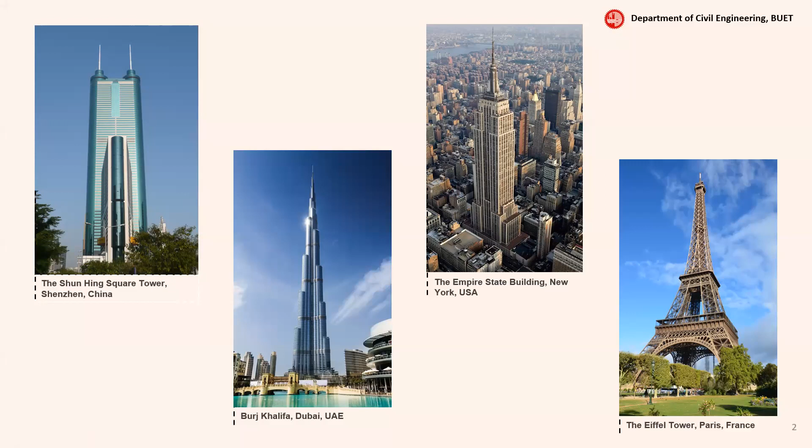Here are some recently built steel structures constructed over the last few decades. There has been a gradual shift in construction materials from concrete structures towards steel structures all over the world. For this purpose, two types of steel are mainly considered: carbon steel and stainless steel. The difference between them lies in their chemical composition, where one contains carbon but no chromium, and the other contains chromium but no carbon.

The life cycle cost of carbon steel is higher than stainless steel, though its initial cost is lower. So it is mainly used in steel products in construction.

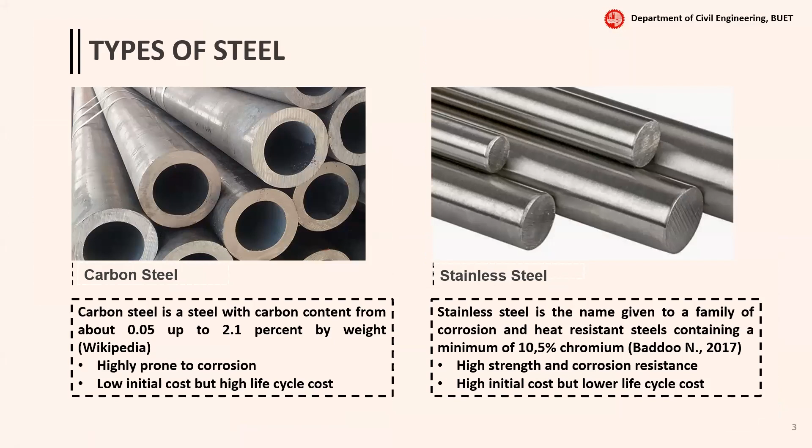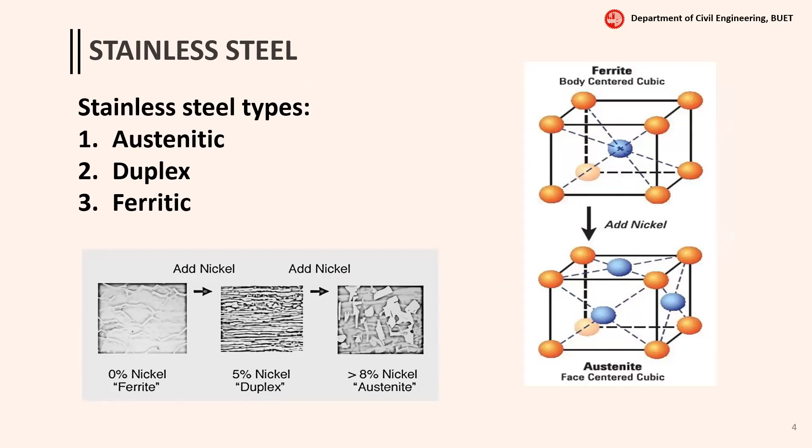There are three types of stainless steel: austenitic, duplex, and ferritic. The difference between them lies in their structure, as shown in the figure. In our study, we will talk about different grades of each of these types. So let's dive into our structure.

The use of steel in construction is becoming popular. However, the most important aspect of steel, its capacity to sustain load when it faces fire—the fire resistance characteristics such as fire rating—has not been well studied at this base.

Addressing this research opportunity, we formulated a plan to evaluate the performance of different grades of stainless steel beams under standard fire using fire ratings as a parameter, and compare the performance of stainless steel beams with that of carbon steel. It is to be noted that by fire rating, we mean the duration for which a beam can sustain load in fire without failure.

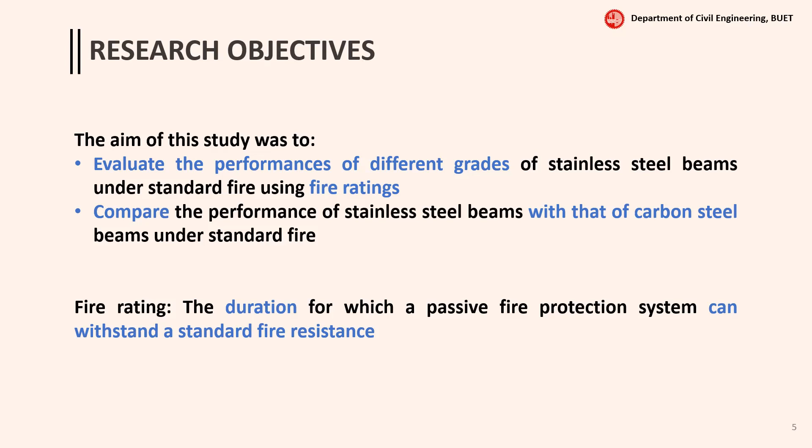Research methodology. Before moving to our findings, let's understand the methods used in our research. For analyzing the behavior, we took two criteria: comparing the performance at the same loading condition while changing the beam section, and comparing the performance at the same section while changing the loading capacity.

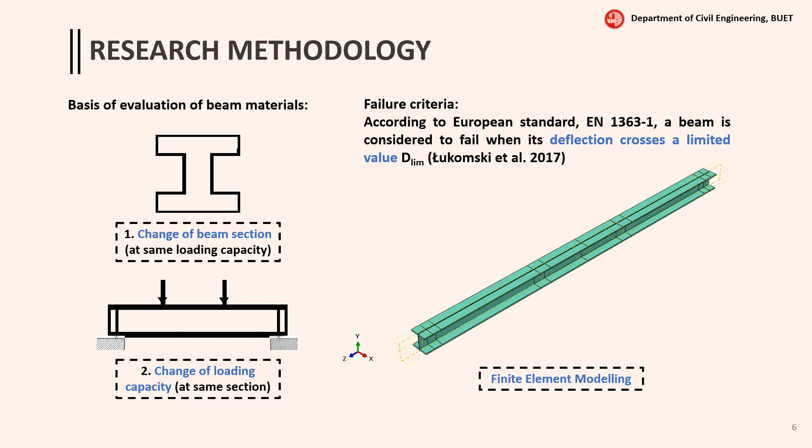For analyzing this behavior, a finite element model was set up from which data was evaluated to get fire rating and failure criteria. The failure criteria was set by fixing a deflection amount calculated using European standard EN 1363-1, beyond which the beam was considered to have failed.

In our study, we used 6 types of materials, including 1 grade of carbon steel, CS355, and 5 grades of stainless steels. 3 beam sections were taken, and 3 loading capacities were applied to each of them.

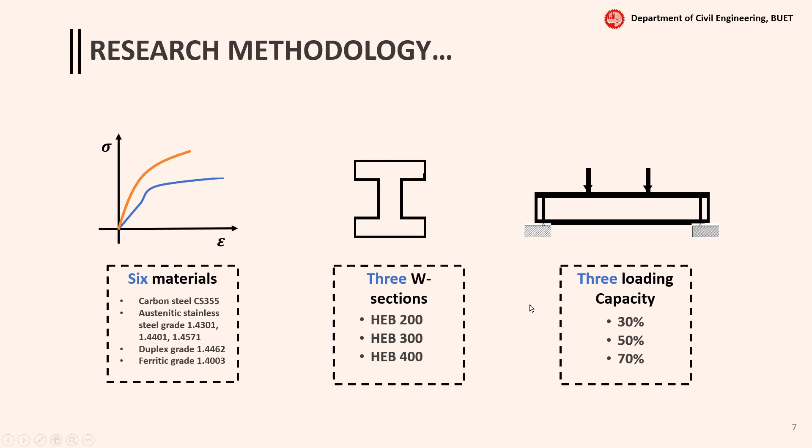The finite element modeling was done using Abaqus CAE version 6.14.4, selecting element type C3D8T, which is suitable for coupled temperature-displacement analysis. Modeling was done in 2 steps: loading and thermal step.

In the loading step, first the structure was analyzed, and then fire load was applied on all 3 sides except the top surface, using fire curve ISO 834 as the firing temperature. The fire loads were applied using convection and radiation with appropriate coefficients.

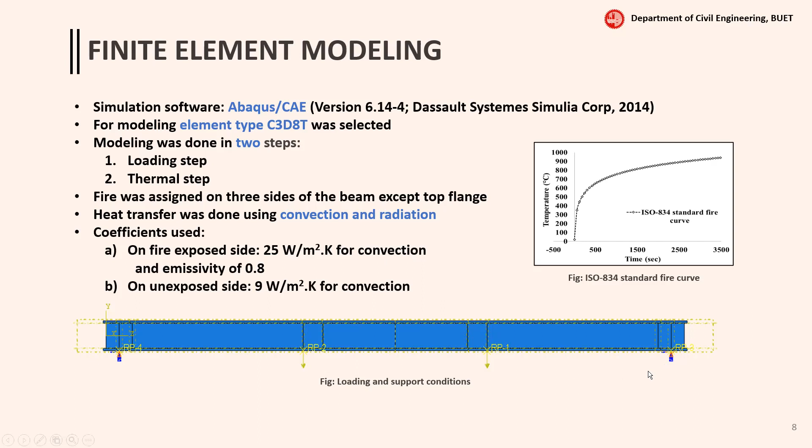Regarding the supporting conditions of the structures: at the left support, translation in the 3 direction was restrained, and at the right support, translation about the 2 direction was restrained. All the rotational degrees of freedom were unrestrained.

Moving on to parametric studies. For loading, we used 2-point loading at desired magnitude, and the load was calculated using class 1 section of Eurocode.

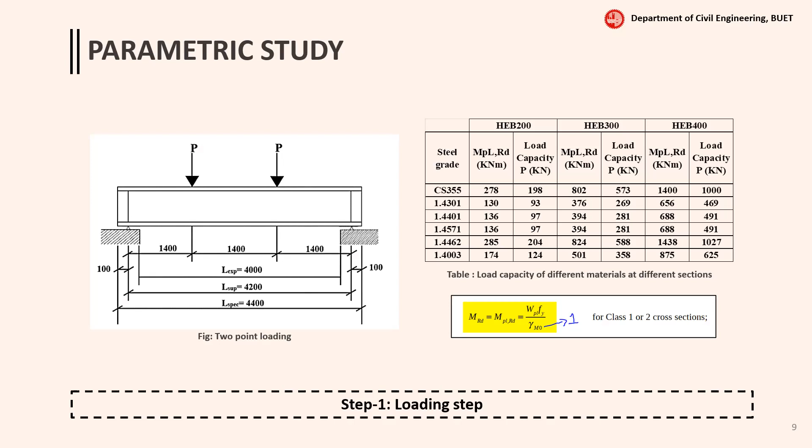Since the characteristic materials of the different grades vary with temperature, we had to calculate the different mechanical and thermal properties of the materials and incorporate them in the model accordingly.

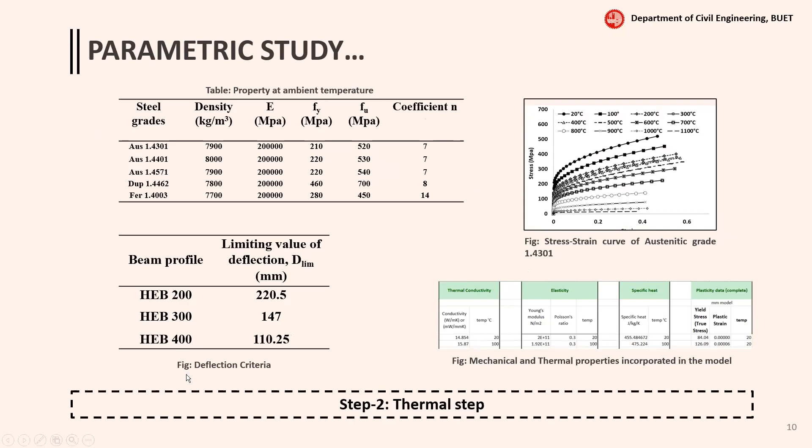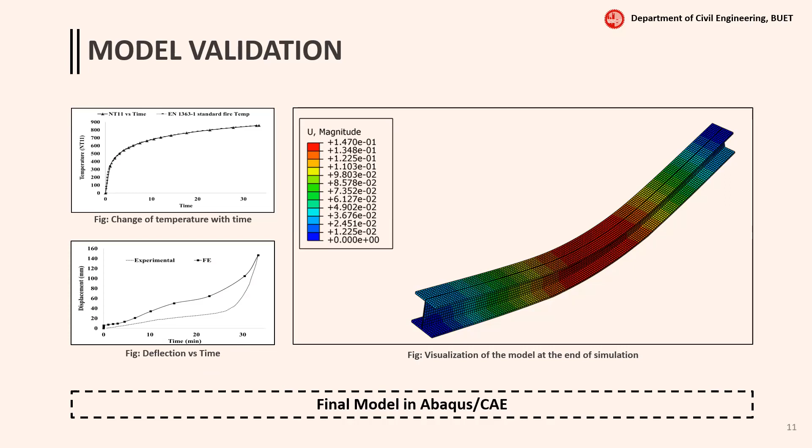Moving on to the results. Let us first analyze the behavior of the materials for fixed loading in a fixed section. It is clear that, except ferritic, all the other 4 grades of stainless steel outperformed carbon steel.

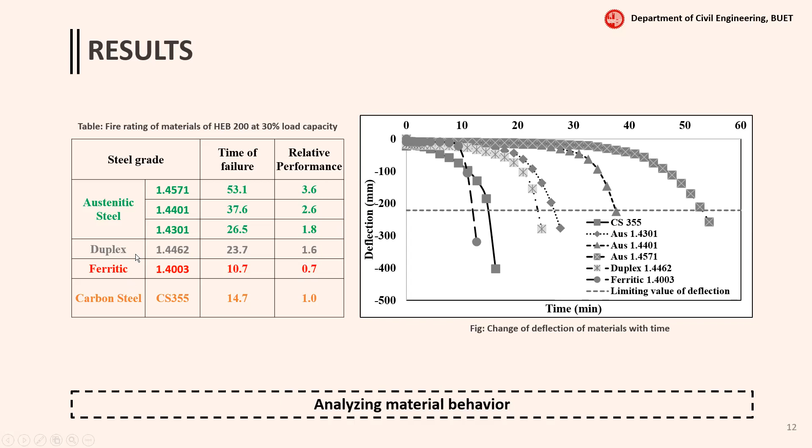There is a difference in performance between the austenitic steels, where one performs almost 4 times that of carbon steel, and the least one performed twice that of carbon steel. The performance of duplex was in between austenitic and carbon steel.

This behavior of the materials can be explained from their chemical composition. We know that in stainless steel, there is the presence of chromium, nickel, and molybdenum in a controlled manner, which is absent in carbon steel, so it performs better.

The difference between the austenitic grades is that the least performing grade, 1.4301, had no molybdenum, which was present in the other two. The difference between duplex and austenitic lies in the nickel content of each, though their chemical compositions were otherwise the same. In ferritic, there is almost no nickel, and molybdenum was fully absent.

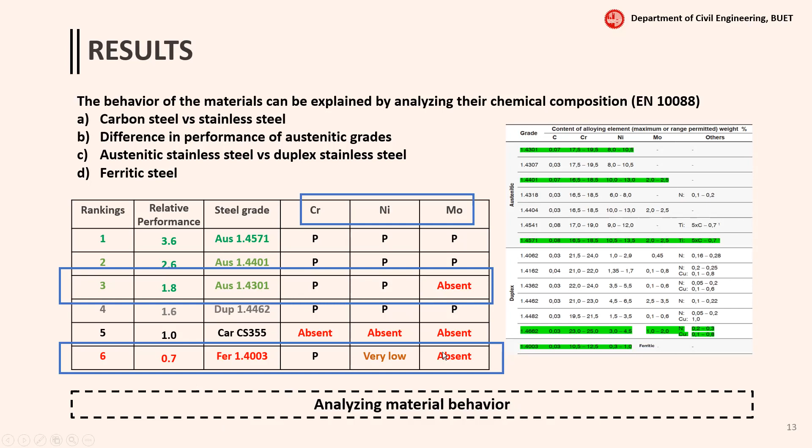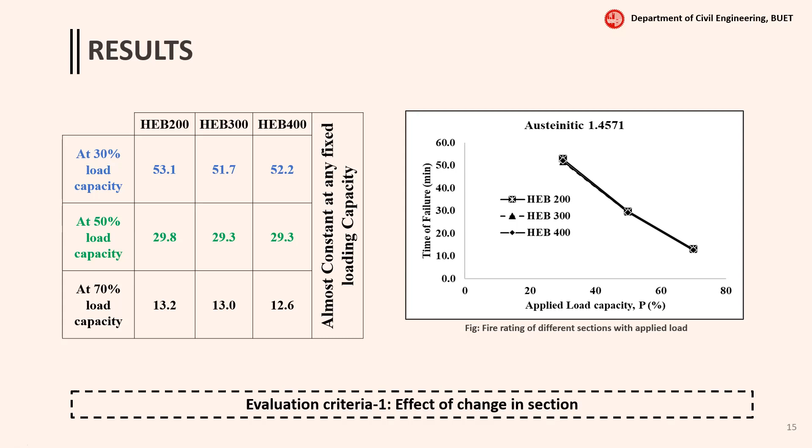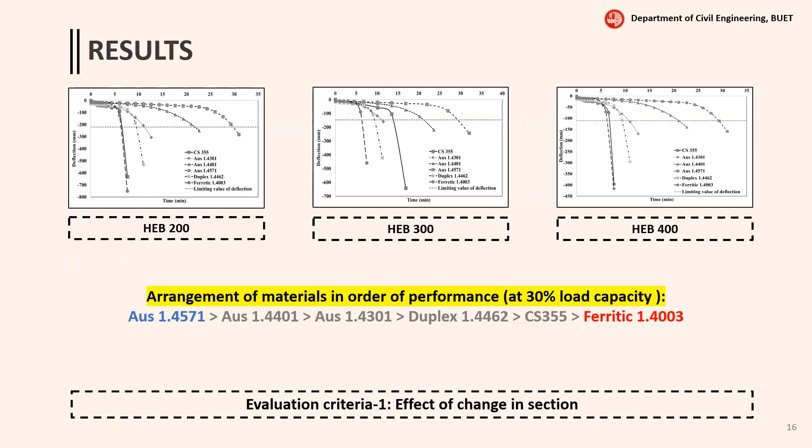Moving on to our first evaluation criteria. For austenitic grade 1.4571, analyzing the effect of change of beam section, it can be seen that at a given load capacity, changing the beam section had almost no effect on fire rating when the loading was constant. This pattern was repeated across all sections and for all materials, as the failure patterns were almost the same.

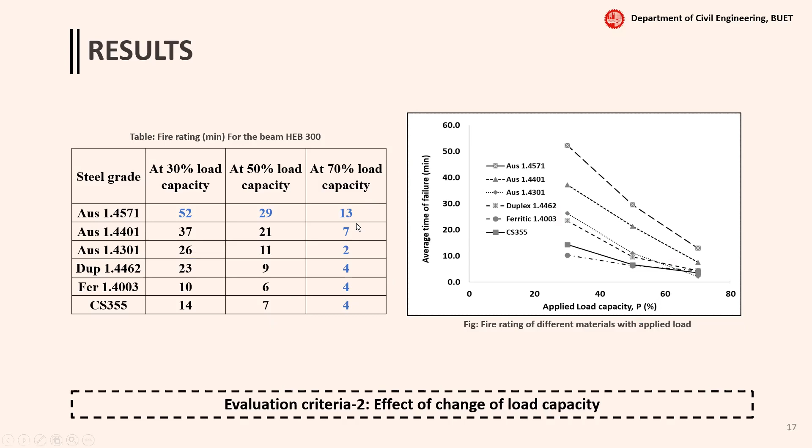Summary of our results and concluding remarks: From evaluation criteria 1, we saw that change in beam profile had no effect on the fire rating of the materials. From evaluation criteria 2, we found that with change in load, the fire ratings decrease. In all cases, stainless steel grades surpassed carbon steel, except the ferritic grade.

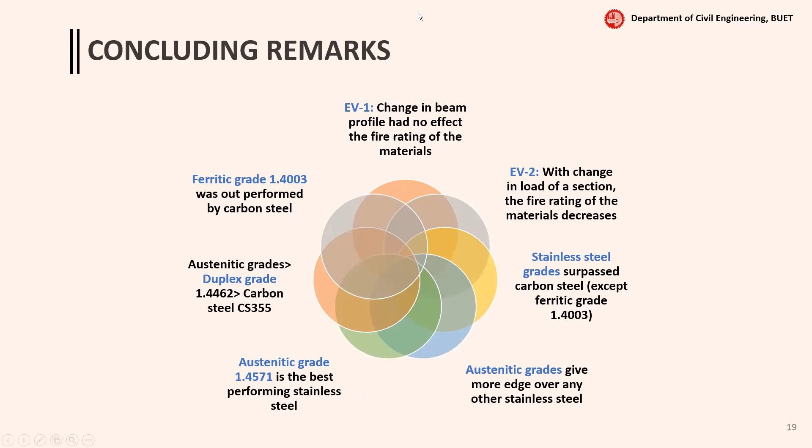Austenitic grades were the best among the stainless steels, with austenitic grade 1.4571 being the best performing stainless steel. The performance of duplex was between austenitic and carbon steel, and ferritic was outperformed by carbon steel. Thank you for your patience.